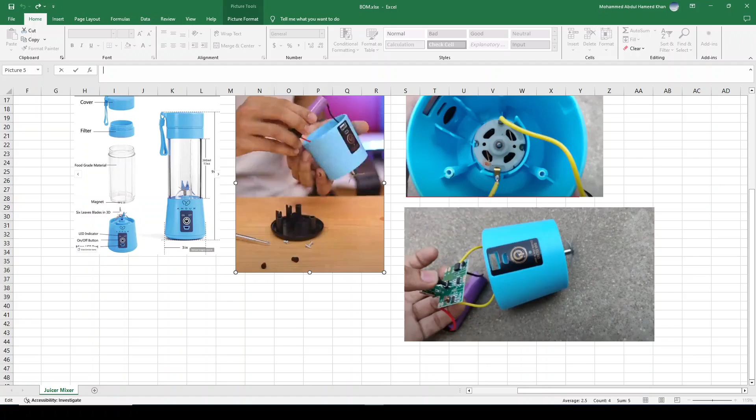Welcome to the next video. In this video, we will be creating a new part for the portable blender, that is the PCB board.

Let me expand this image. You can see this is the PCB board. If you're aware of PCB boards, well and good; otherwise, understand that this is the heart of the blender. The functionality of the blender, the electronic movement, happens with the PCB board itself, because it accommodates certain switches which allow us to run the blade or turn on the motor with which the blade spins. This is the main CPU, the main heart of the entire electronic system.

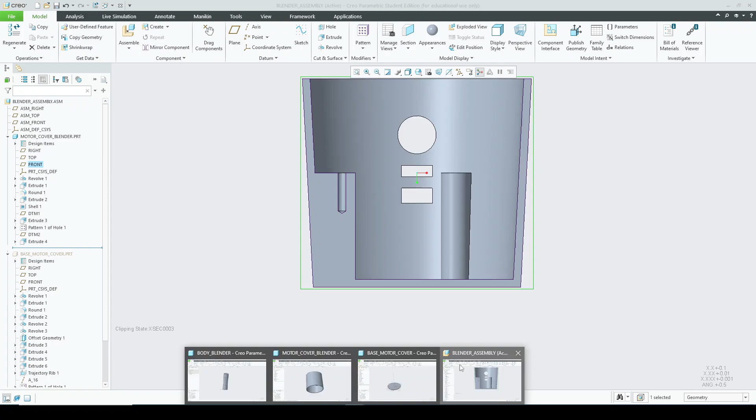PCB boards are found in almost every electronic component that runs electronically. So what we can do is go back to our assembly and try to see where we can accommodate the PCB board.

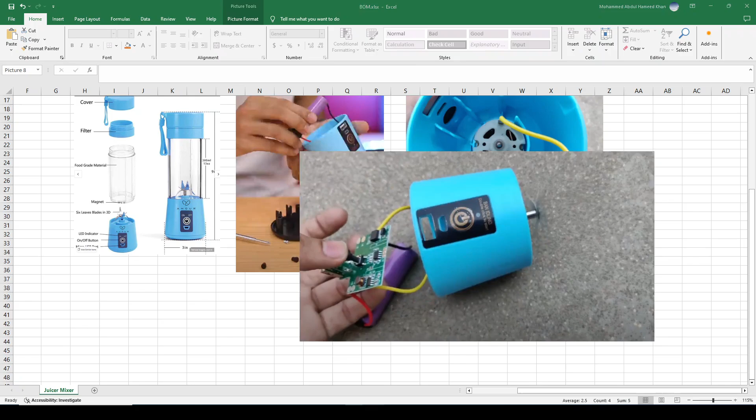Now the switches are at the frontmost region, and the PCB board will have these components: the USB port, the type C port, and the on-off port. Those should be accommodated over here, protruding or extending out from this hole at this space. So the PCB board, if taken as a cut section from the front, should be placed somewhere over here.

Otherwise, if you see the sketch, it should be placed over here. So the PCB board should be created in a way that the components are placed at this side of the board, and the entire dimensions of the board should be such that it is within the volume of the enclosure we have.

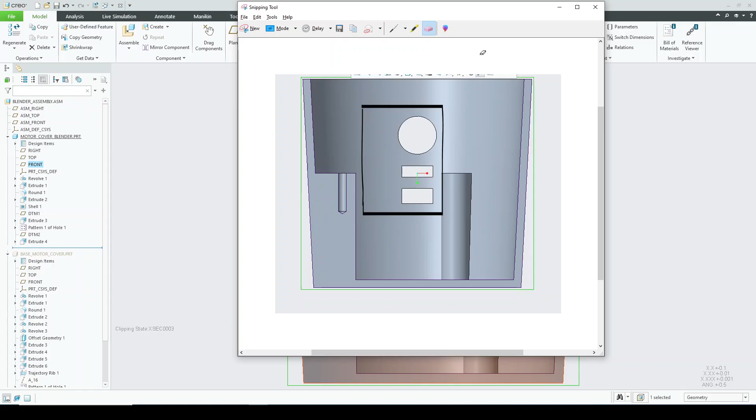Now I'll try to create a PCB board. Firstly I'll click on new, and I'll write PCB underscore blender and press OK. Now firstly, from the front view, I'll just create a simple extrude.

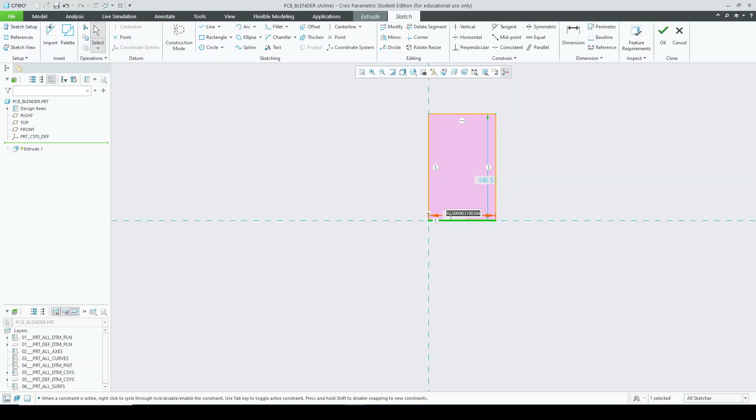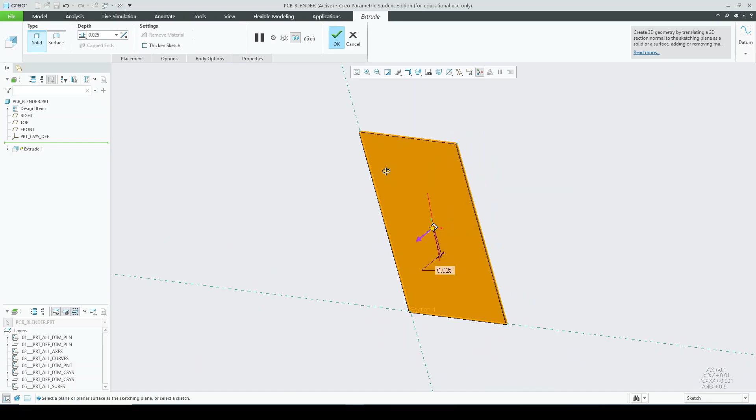Maybe 2 inches wide and maybe 1.5 by 2.5 inches in height, and I'll press OK. I'll keep the thickness of the PCB to be 0.025, because PCB boards are pretty thin, and I'll press OK.

Now what I'll be doing is, firstly I'll save this in the working directory, and I'll be importing this into the assembly. Now I'll click on assemble, and I'll go to in-session PCB blender.

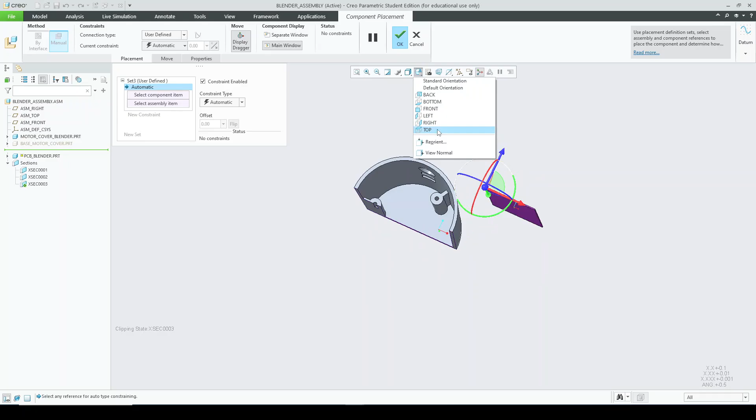Now firstly, from the top view, I'll be aligning it. So, somewhat this position. I think I have to reduce the width of the PCB board. Never mind.

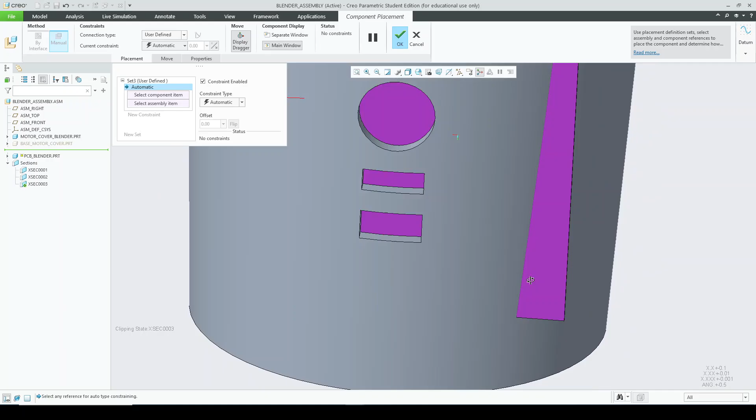This is how we actually work conceptually and understand what should be the sizes of the parts. It depends on the amount of volume we have. The switches should be at this position. Now mind you, I'm not working on creating all the components because that is a different field of study. We are just assuming a rectangular block, and we'll be creating features to make a representative shape of the PCB board.

So this is fine, I'll press OK, and I'll change the color of the PCB board to something different. I'll activate the board, and I'll click on extrude again, edit.

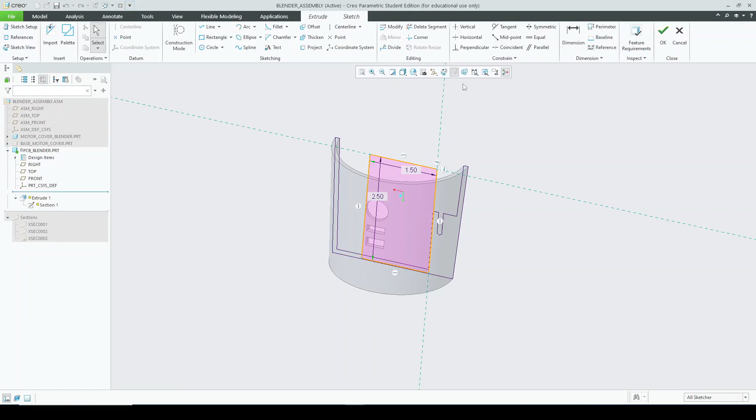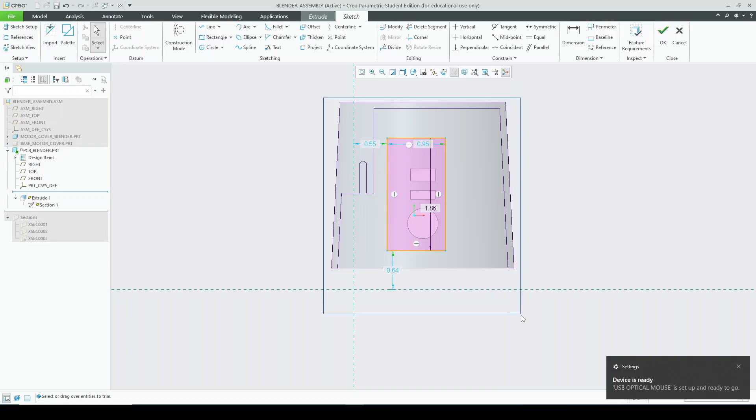Now I'll reduce the width and the height, and ensure that I have the strong dimensions. Now this looks good to me, and now I'll reactivate the PCB board.

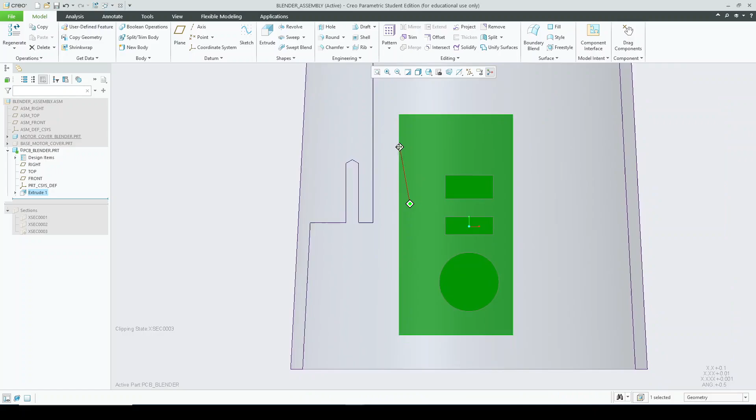And on this surface I'll be creating the USB port, the type C port.

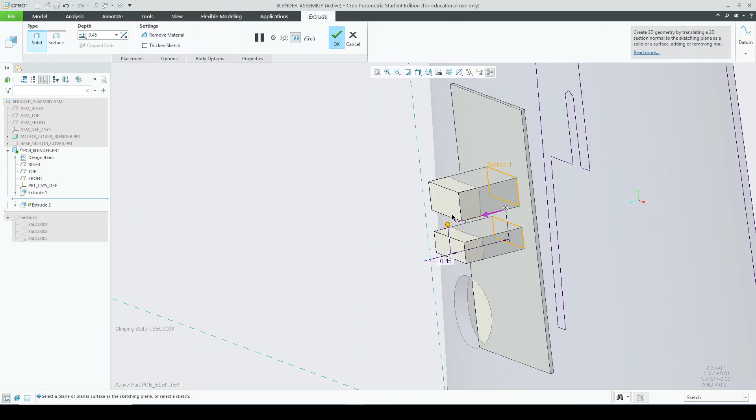Alright, I'll just go to the references, delete the motor cover and click on solve. Select all the dimensions, press Ctrl T, press OK. So these will be the switches, the USB port, the type C port, or whatever you can think of.

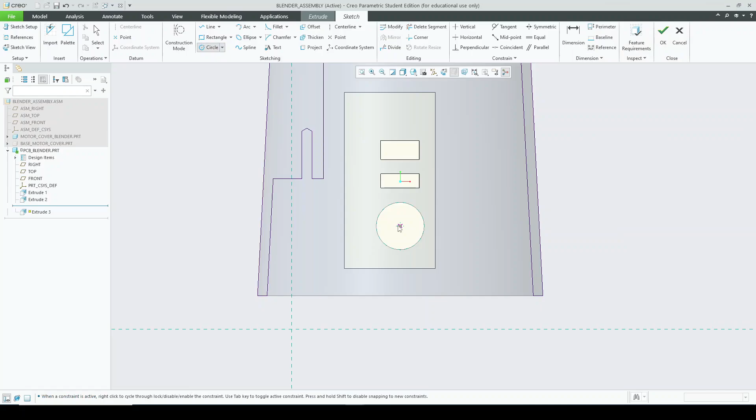I think I've not created the on off button, so I'll just recreate it with another extrude. I'll just add a reference, close it. The purpose I'm adding a reference is because it allows me to select the center point. Otherwise I have to just presume it on my own. And after selecting or creating, I'll just delete the reference, solve it, and change the dimensions to be strong. So these are coming out.

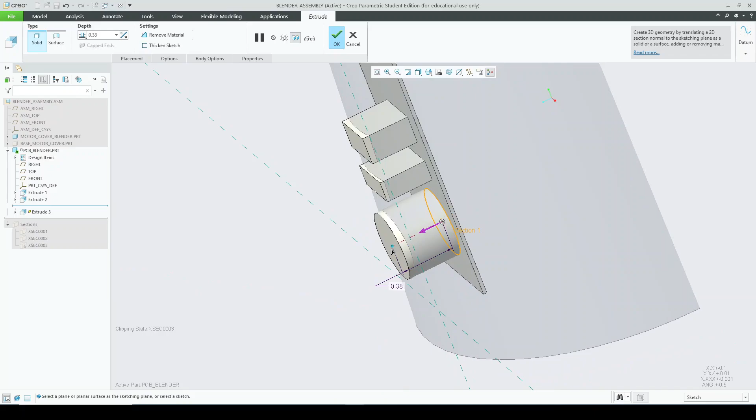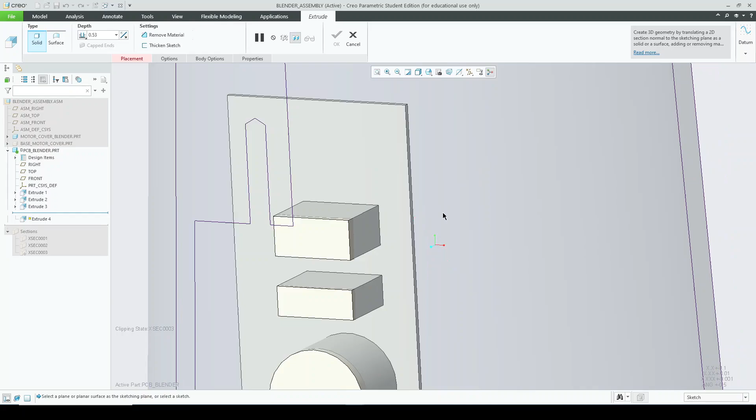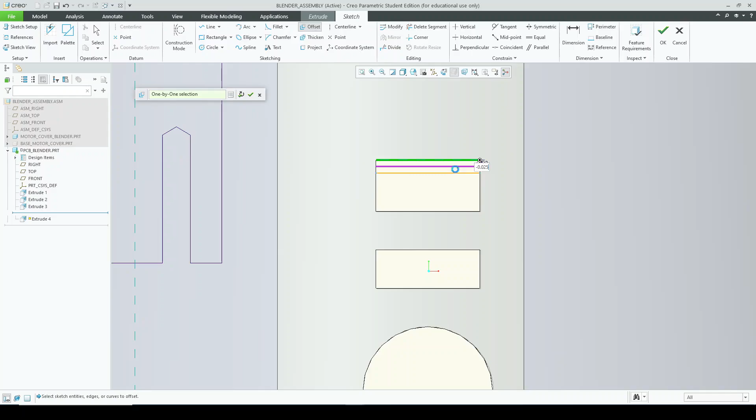All right, we can make it more representative by adding certain cutouts. I think I've not created it exactly. Nevertheless, that's fine. So what I can do is I can offset it, maybe minus 0.05, or 0.025. Press OK. Press OK. Press OK.

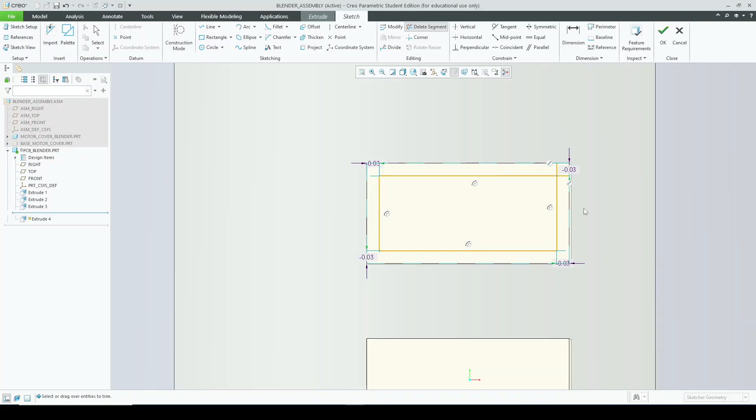Now that I've just offset it, I'll just delete the unwanted segments and have this material removed, so it kind of represents a USB port. You can do the same thing for the type C port.

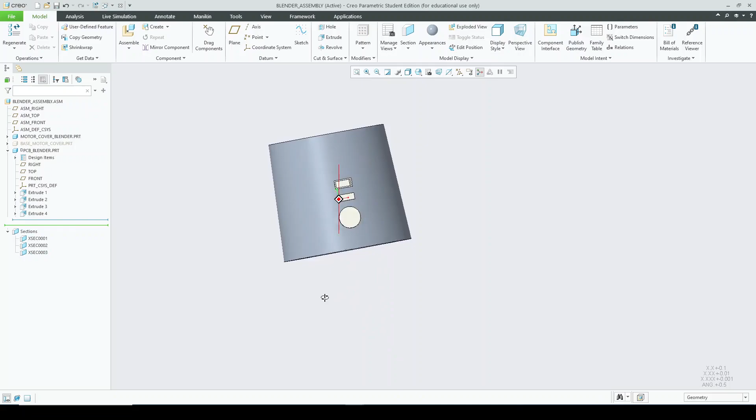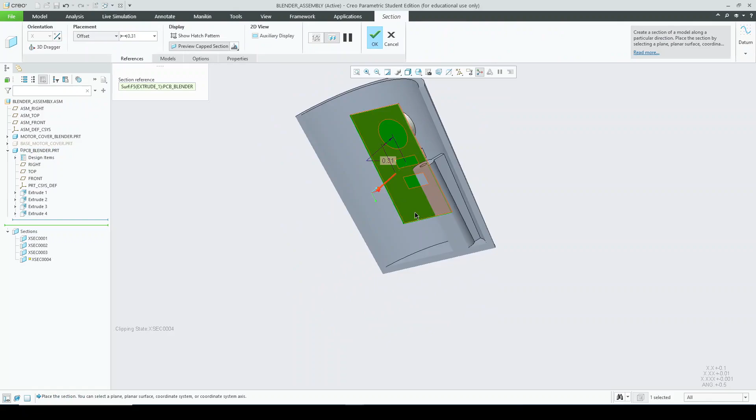Now I'll just turn on the assembly, and this is how the PCB board looks when it is properly installed at its position. Now you might be wondering, can I just leave the PCB board in the air? Well, we cannot. So we have to create certain features that will help us align it with respect to the y-axis. For example, if I'm taking a cut section at this position, you should have certain features that hold the vertical positioning of the PCB board.

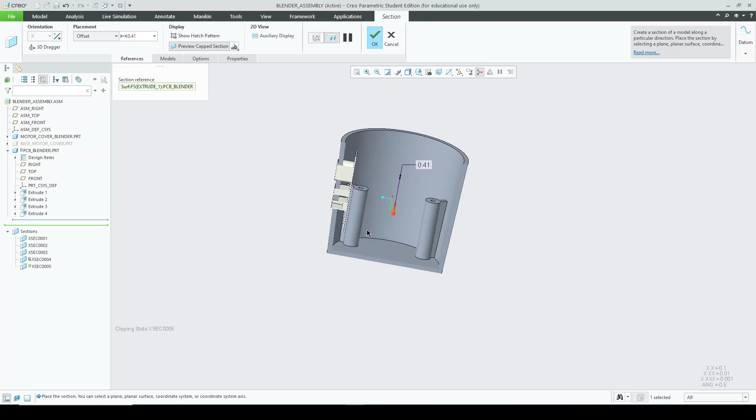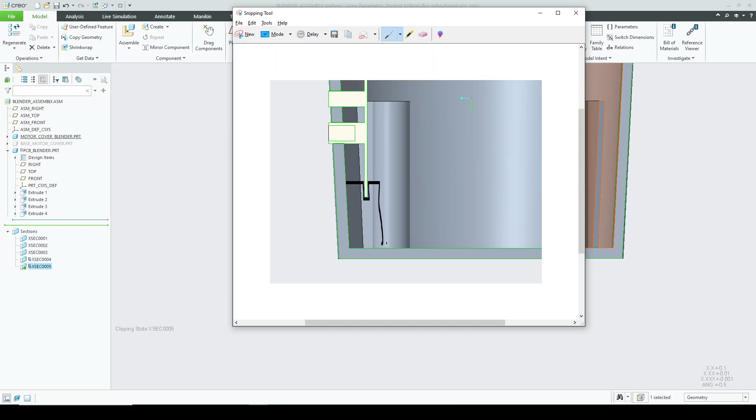So what I'm planning is to create a feature which is kind of a rib. Let me just try to create a zoomed in view first, take a snip and draw. So I'll create a rib something like this, but the top portion of the rib should be something like this. So this will allow the board to be seated in the slot, because I'll create a slot in the rib. That is the intention over here. Now definitely one slot is not sufficient, at least we should have two slots.

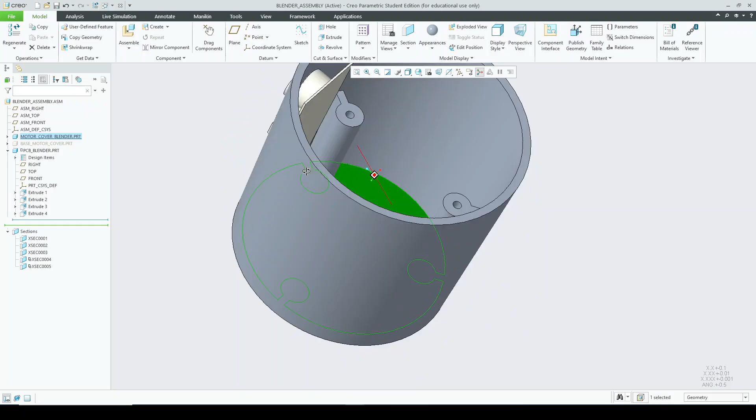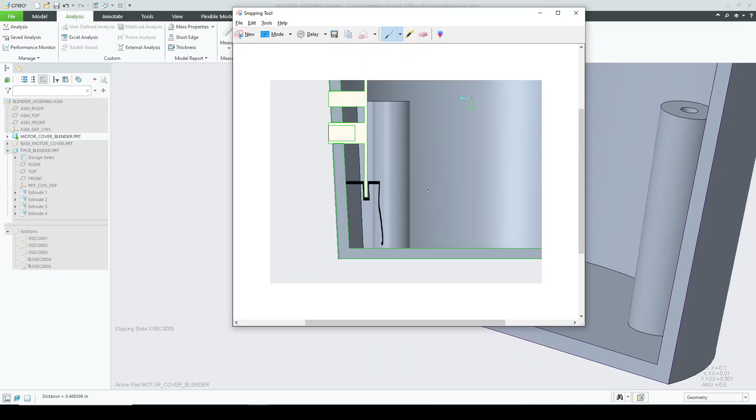So let us just try to create a rib first. Firstly I'll be evaluating the distance between the current position of the PCB board and the base of the PCB board. So it's around 0.48. I'll just copy it. Now just remember that the rib which I'm illustrating in this snip is a feature of the motor cover. So I'll be creating a plane over here, and then I'll be adding an extrude which replicates a rib.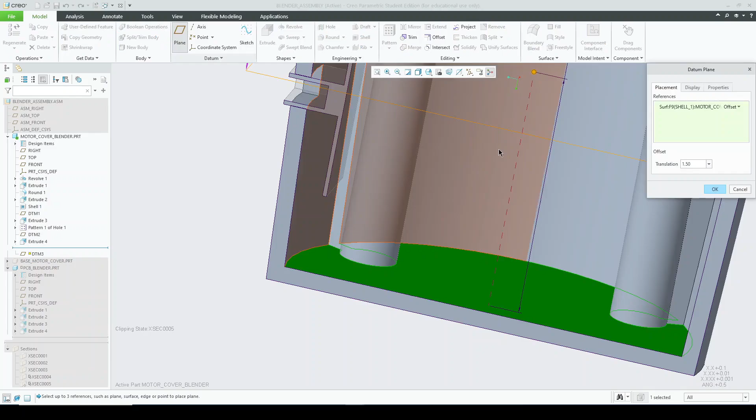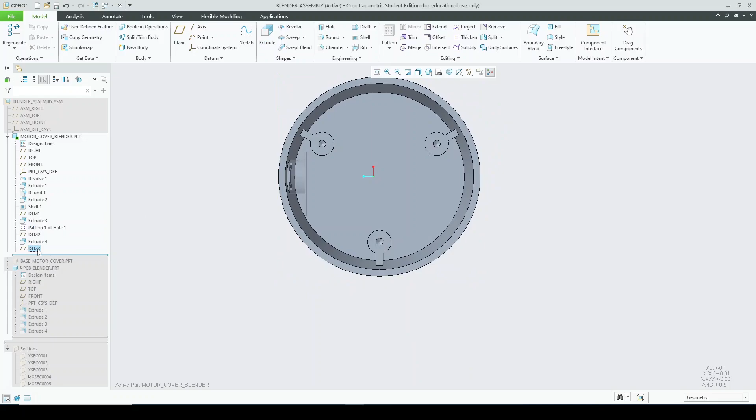Select this surface, click on plane, offset it, press OK. So you have a plane at this position. Activate the Blender assembly, turn off the section, reactivate and align it. Ensure that you're selecting the plane which you have created right now and select the extrude option. Alright, now I'll be creating a rib, something like this.

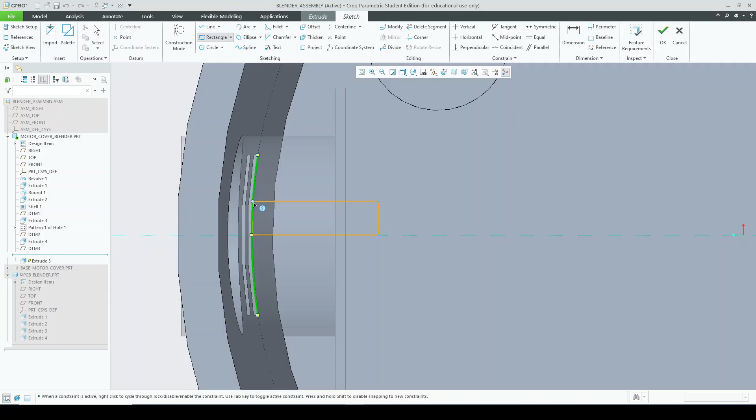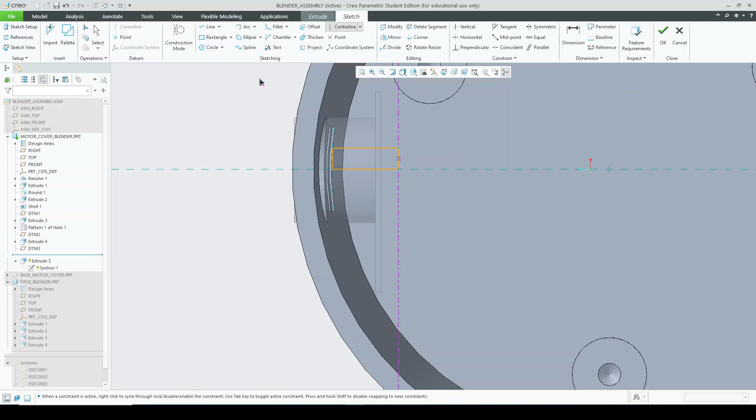I'll just start from here, maybe end it over here, and the distance of rib is 0.1, and I'll just press Ctrl T. Let me see how it looks. So it should be on the opposite side till the next surface. Alright, I need one more rib over here, so I'll be adding another placement at the same position. Okay, so it's equidistant. The widths are same, and I'll just press OK.

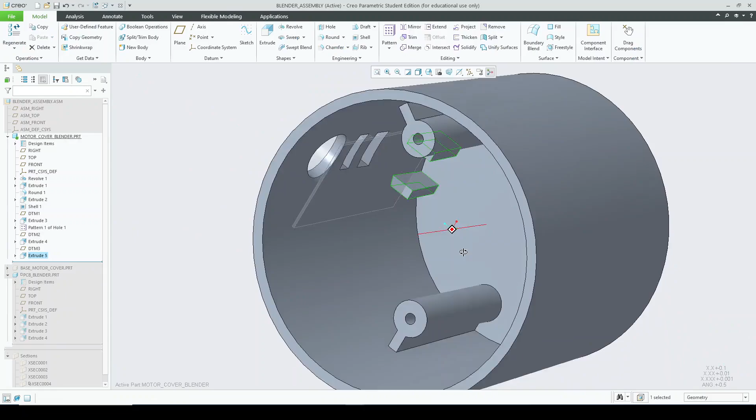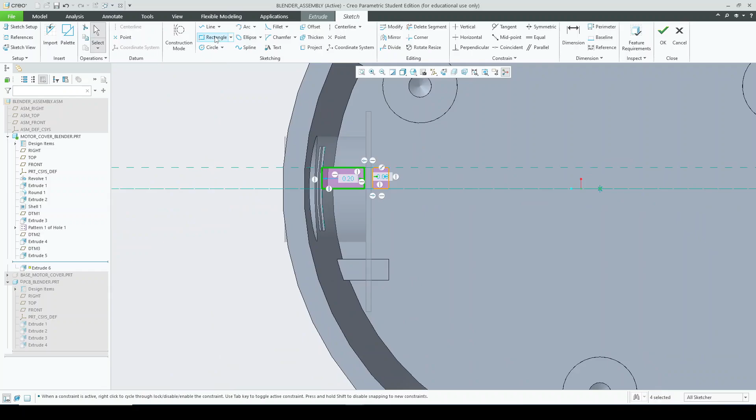So this is created. Now I want certain material to be on the upper side of it. So I'll just re-add another region. Alright, so that gap will be the slot. I'll just create a center line. So with the same reference points, I'll be creating two more rectangles.

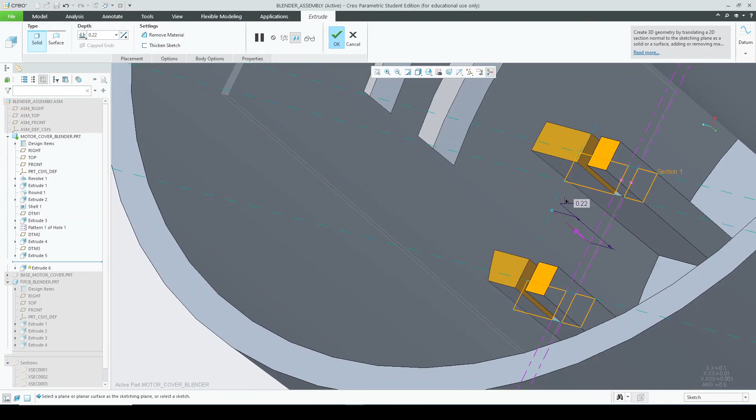Just reduce it. Now activate. This is how your assembly can look like. So when we are placing the PCB board, we'll be placing it in this slot.

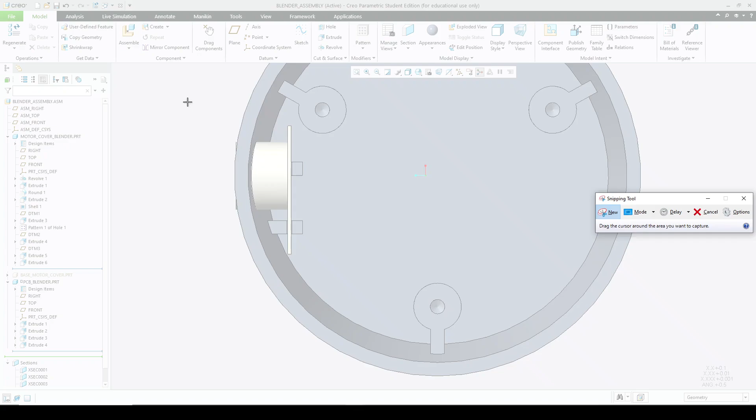So this will restrict the up and down movement. And the insertion of the switches in these slots will restrict the left, top and bottom position. For example, if you are viewing it in this orientation, this motion is restricted by the switches itself.

Or we can add features that can allow us to restrict that movement also. Maybe we can add a rib over here. Let's try to work on adding the rib. So that is a kind of learning for us.

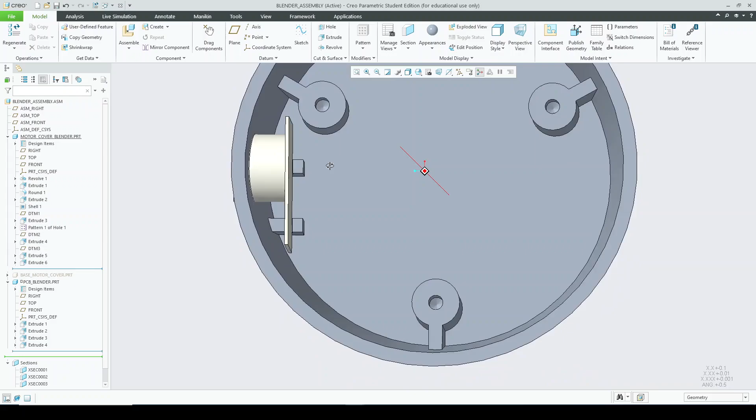I'll reactivate this. First of all, I'll go to the same plane. What I'm thinking is, in order to restrict the up and down movement, I'll just try to add a... I need to join this boss, otherwise that will be better. Maybe something like this. Need to start from here at least.

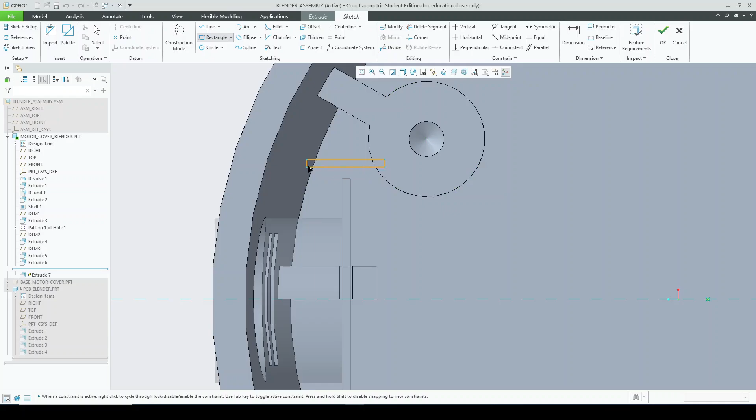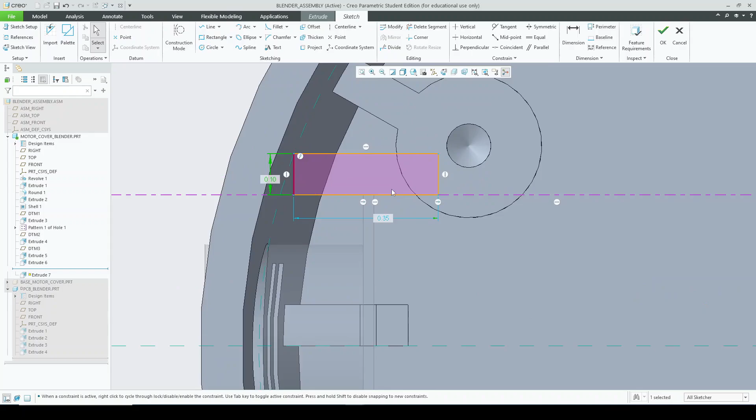First of all, let me draw a center line from here and create a boss, something like this. This should be 0.1. Sorry, this can be 0.05, half of it, and the remaining half can be mirrored on this side, and this region can be deleted.

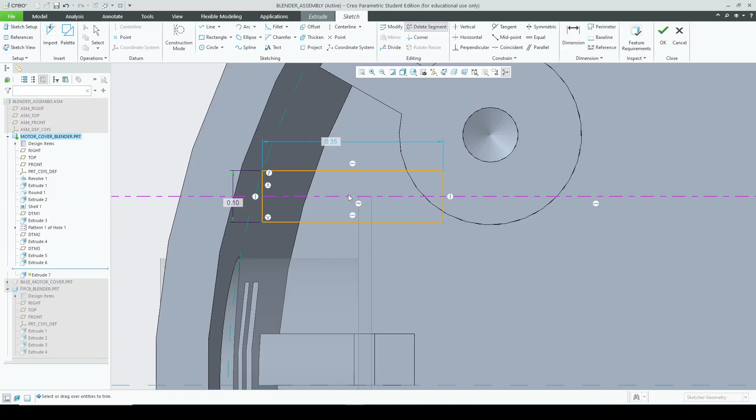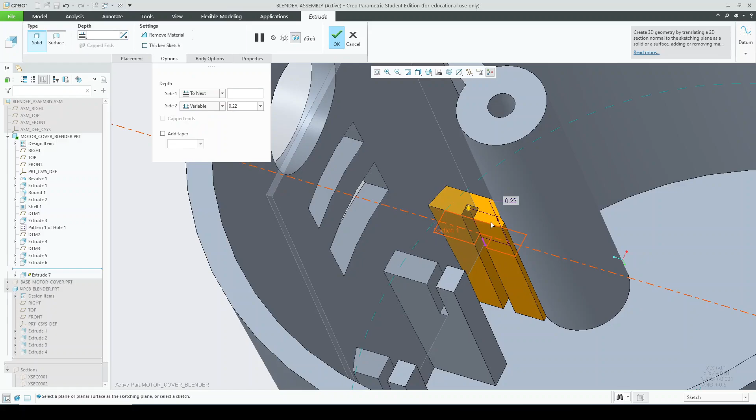And maybe I can create a slot, something like this. Extrude it to next at the base, and I can use the same thing with variable thickness on this side. So I can just connect this in order to avoid this kind of features, because in manufacturability it's required to have smoother edges. So I'll just extend this, maybe something like this, press OK.

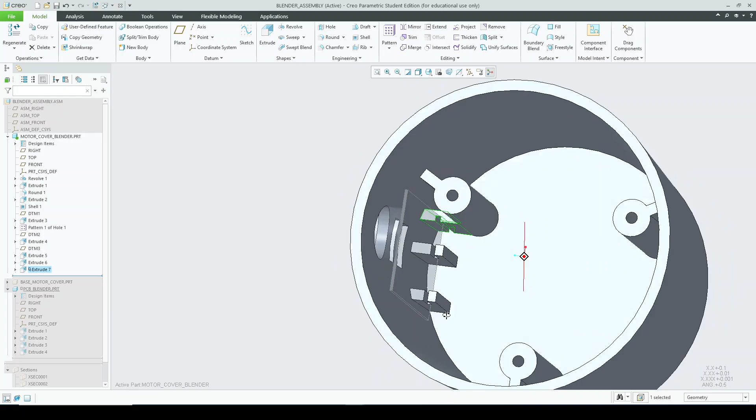So I have an additional rib over here that restricts this motion, and I need to have it over here as well. So what I can do is, otherwise maybe I can push this to the bottom and convert it to something similar to this, and push this one to the center of the rib, center of the PCB.

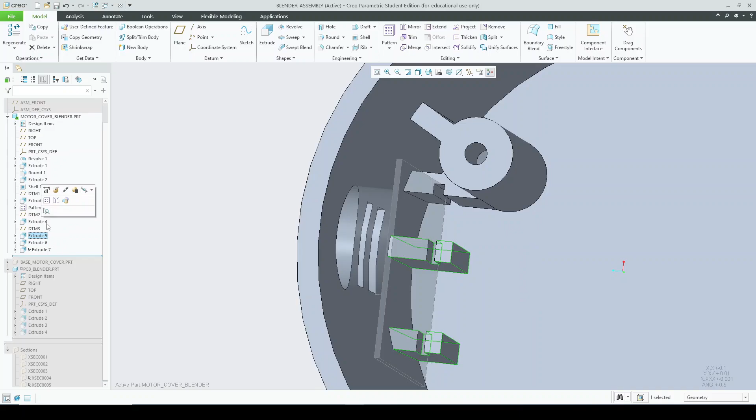Okay, so I'll just go to edit. So this was extrude number 5, I believe. Go to edit. Okay, so the center of PCB is somewhere over here, and I'll just delete this.

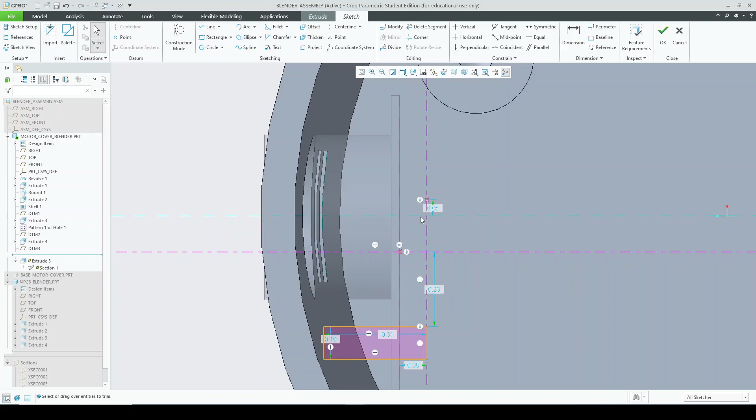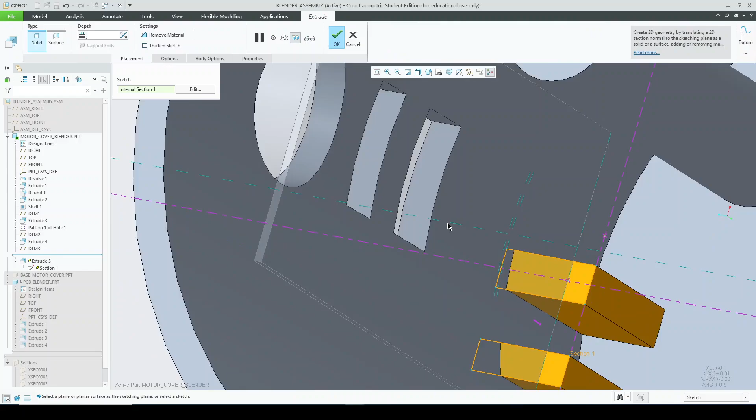Create a rib something like this of 0.1 diameter, make it symmetric. Make this. All right, this looks fine to me. I'll adjust the top.

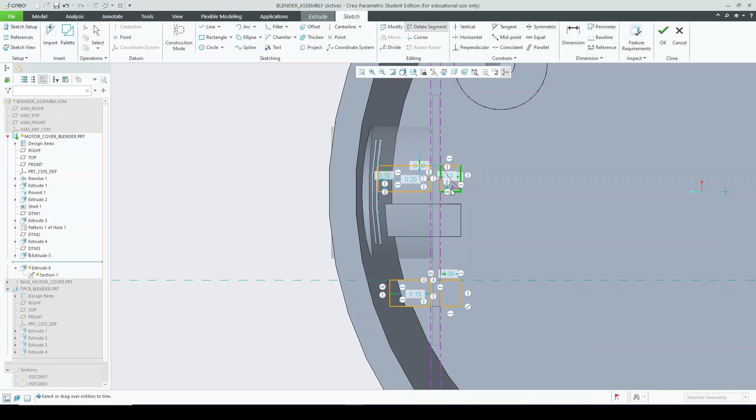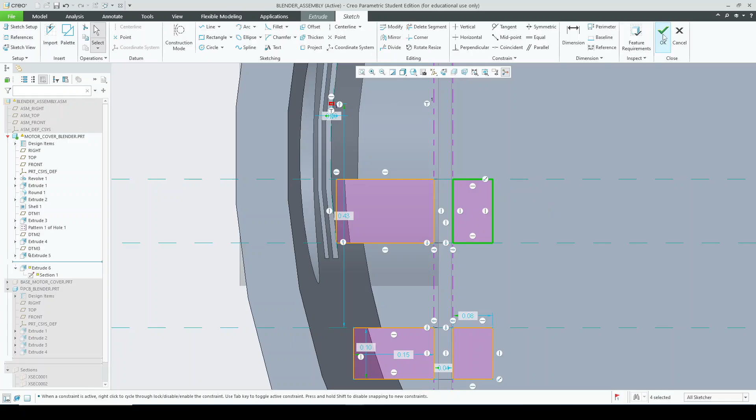Sketch which I have created on this. Let me delete these points. Let me add two rectangles on these references. Why is this? Okay, we have certain sketches over here. Now this is fine. Created the center one, the extreme right one, and I'll just modify this one to be the base.

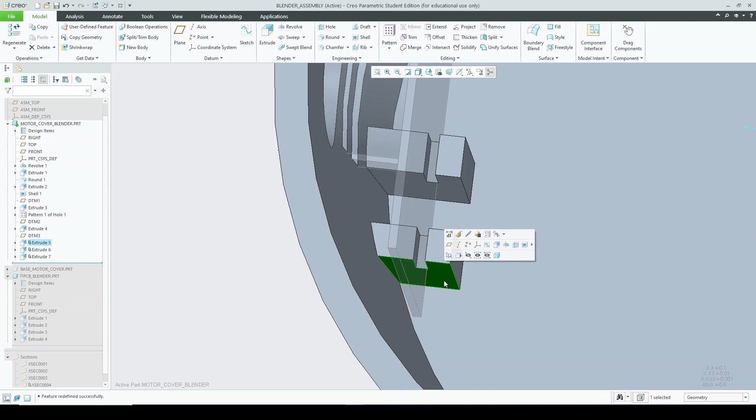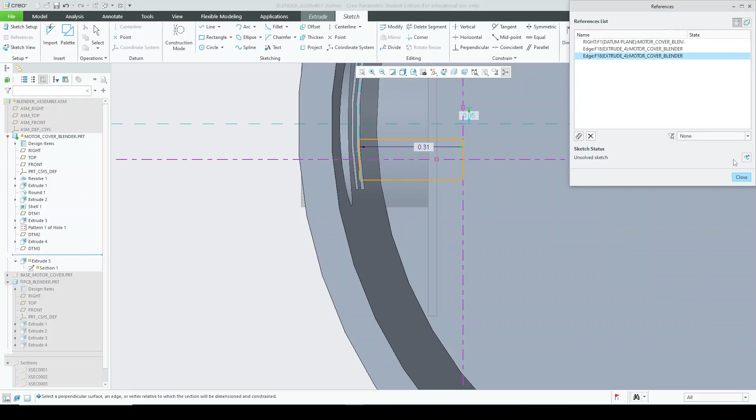This was extrude number 5. I'll simply delete this, press OK. I'll just turn on extrude number 5. Looks like I have some external references sorted. I'll just go to extrude number 6, edit them, delete this. So this is how conceptual designing works.

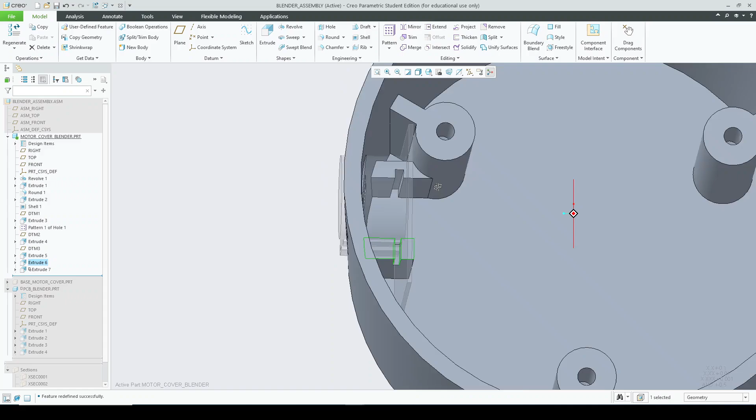You have to play back and forth with the designs in order to have an optimized design. I could have excluded this because I was thinking to control it with these switches itself, but maybe adding more features can help us improve the quality and the fitment of our designs. So I'm doing that thing right now.

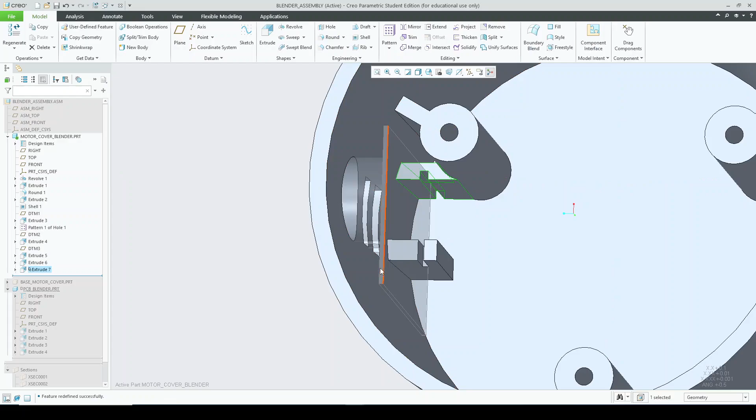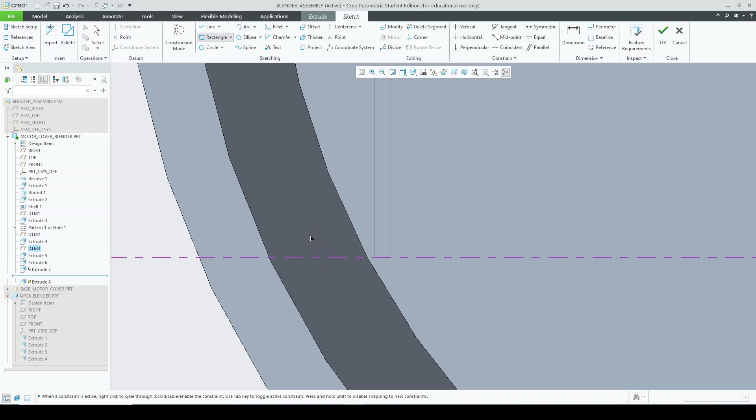Press OK. Now I need to create another design, something similar to this one, to restrict this motion. So I'm extruding on this plane what we have created, and firstly I'll just create a center line over here and create a sketch of 0.1 thickness, till this point is sufficient.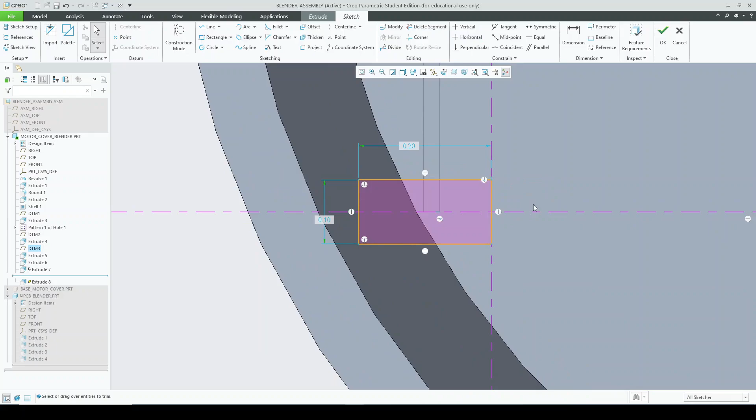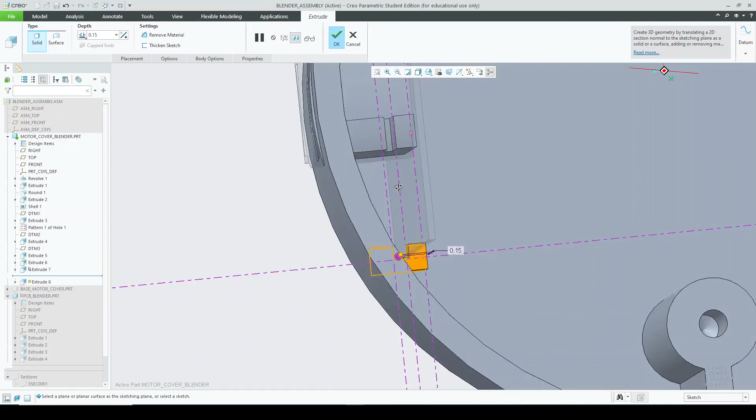This has to be... let's try to create a rectangle over here. Change the direction and go to the next.

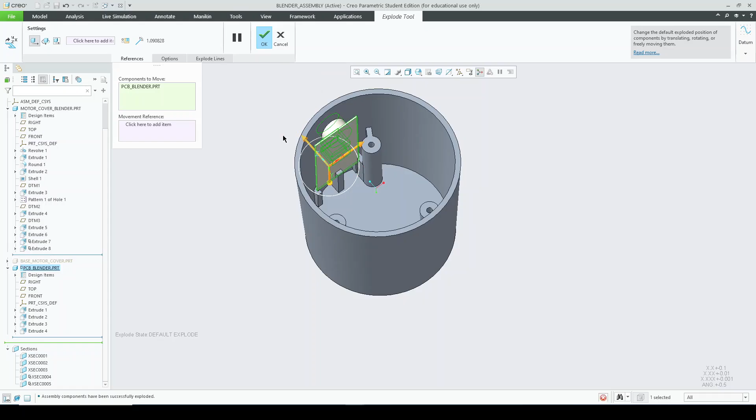Now I'll be turning on the Blender assembly. So placing the PCB, when the user is taking the PCB, he should ensure that the PCB, not the USB, should be placed in this slot. So the right and the left rib with the slot restricts this motion, and this slot restricts the up and down motion. So when we are constraining, we can do the same constraints as well.

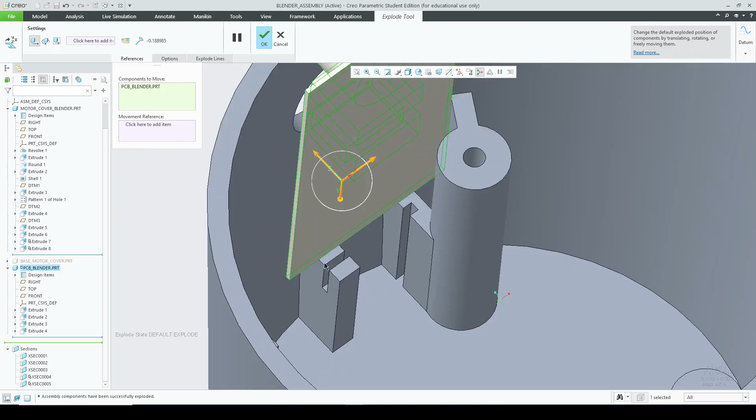All right, so I'll just undo. Now let us pause the video over here and move to the next video.